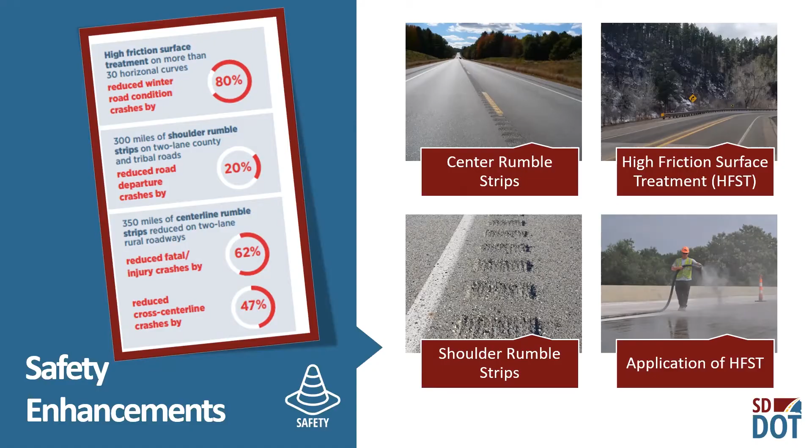So as you look at reliable transportation systems, we're focusing on new innovations. In the upper left-hand corner is a diverging diamond interchange. For those who've been in Sioux Falls, the 41st Street interchange, you know it's pretty tough to take a left coming off the ramp. Things really get buggered up. By looking at a different interchange configuration, we can help move traffic more efficiently and more reliably for folks traveling every day, and it's also a safer situation.

If you don't have the 511 app, I highly suggest you get it. Again, transportation systems being reliable. Hopefully you're using this app when traveling in winter or during summer construction season to see what's coming up, where construction is planned, and how you can plan your trip accordingly. In the winter, obviously, that's where we see our most hits. People are interested in road conditions, and whether they'll be able to get to their destination. This has been a tremendous opportunity to share that information with travelers, and again, help make our roads safe and our transportation system reliable.

In the upper right-hand corner, everybody's seen them, those are our dynamic message boards. These flash messages, Think Thursday messages, you probably see them every Thursday. It might be a little goofy sometimes, but the intent is to catch your attention and also make you think about your driving behavior and share that with others. We also use it to inform folks of closures, crashes, things of that nature, real-time information right on site to help make that system reliable and safer.

In the lower left-hand corner is something we don't have a lot of in South Dakota: congestion. My interpretation of congestion is a lot different than folks who live in LA or Minneapolis, but still, congestion is congestion, and we get frustrated when we see it. So we're working with our partners with the city, whether it's at the 41st Street diverging diamond or LaCrosse Street interchange, trying to reduce congestion and get people where they need to be in a time that feels appropriate.

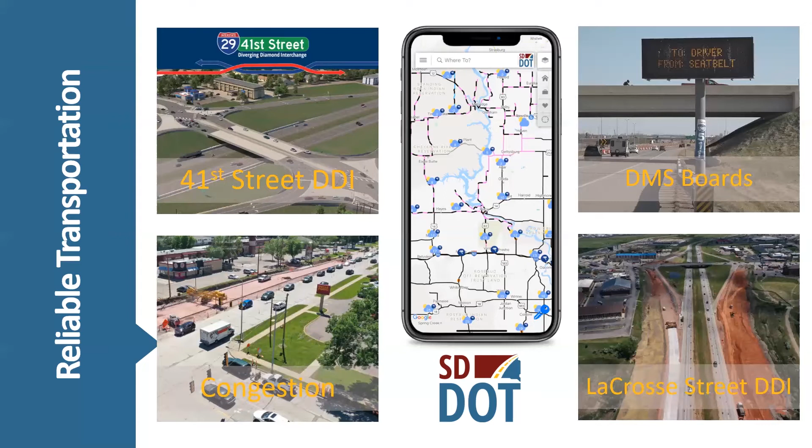So having a reliable system and a safe system is great, but we need physical assets. We need physical things out there in order to make that transportation system work. I really like this map.

It's just a picture of the bridges in South Dakota. Every single one of those blue dots is a bridge, and you can actually see the main river systems and tributaries that tie into them, whether it's the Jim River or the Big Sioux. The sheer number of structures we have in South Dakota is a little daunting for the number of people who actually reside here. We have over 5,700 publicly owned structures or bridges in South Dakota. That's a huge, huge investment.

We're working with our local government partners. As I mentioned earlier, we need an interconnected transportation system. It doesn't do us any good to grow grain in the back quarter if we can't get it to market. It doesn't do us any good to live in a house if we can't get to where we need to go. So working with our local government partners, whether through the Bridge Improvement Grant Program or a local federal aid bridge program, we're trying to improve structures across our state, not just on the state highway system, recognizing the interconnectedness of our transportation system.

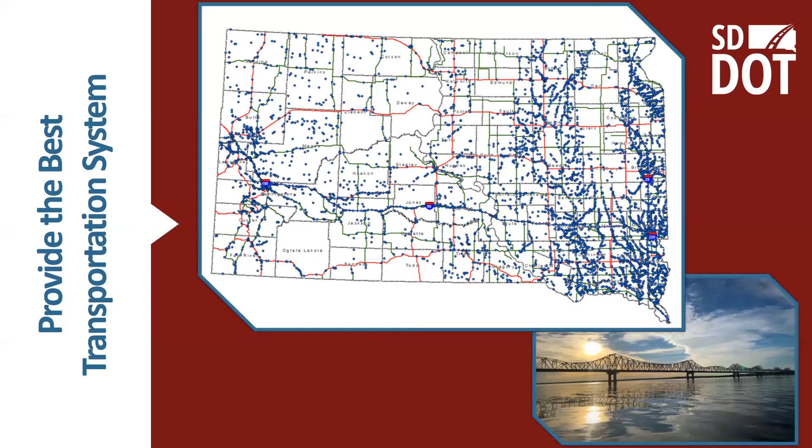As we look more at the state highways, we need to remember that, unfortunately, assets age. And when assets age, you'll have a good chance to see one when you step out the door tonight, with the replacement of the Lieutenant Commander John C. Waldron Bridge, the Pierre-Fort Pierre Bridge, as some of us call it. You can see on this graph the relatively large number of structures we have that are 45 to 70 years old.

This coincides very well with the build of the interstate system and the Federal Aid Highway Act. There was a lot of infrastructure built in that time frame. We've done a tremendous job as a department maintaining and really preserving those structures over time, with over 95% of our bridges in good to fair condition.

So we're in a good position now, but like every asset, whether it's a 1984 Chevy pickup that you got, at some point in time it's no longer feasible for us to maintain those. So we're working to flatten that curve and do those bridge replacements earlier, and also not run into that bigger problem 8, 10, 12, 15 years down the road.

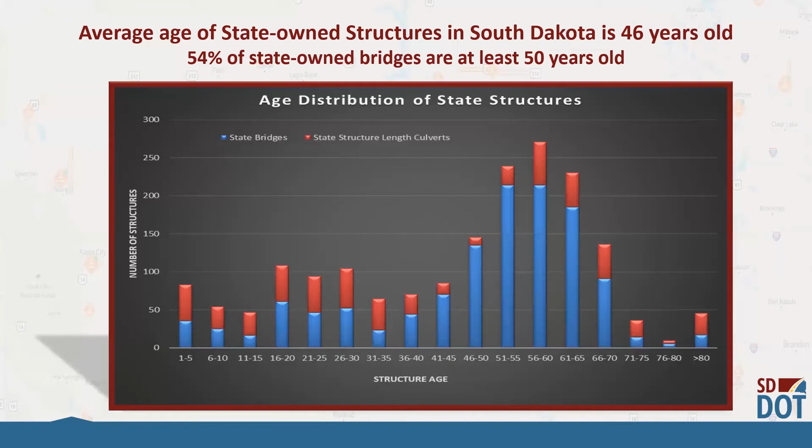We're also trying to focus on good long-term solutions with our bridges. The picture in the upper left-hand corner is what we call riprap, or rock. Everybody should be familiar with it, you see it around structures. But if we can improve the reliability during flood times, which we saw some of in 2019, especially along the I-90 corridor near Mitchell, if we can improve the reliability and plan for those higher events, it improves our resiliency as a state.

Now instead, we have an overtop on a roadway. Roadways are a lot easier to fix than a bridge.

The upper right-hand corner, that's one of our drones, or unmanned aerial systems, and we deploy them throughout our state. They're mainly used for our bridge inspection purposes. The drones have been very efficient and very effective for us to actually visually inspect our structures across the state — time savings, better quality. Deploying technology like this is allowing us to be more agile and deliver a better transportation system.

The lower right-hand corner, that's steel, but it's a different type of reinforcing steel. Historically, a long time ago, we used essentially black steel on our bridge decks. For all of us that live in South Dakota, the upper Midwest, we know we need to add a little chloride, a little bit of salt in the winter to get that ice off the road. Black steel and salt and water really don't mix, so we transitioned over time to epoxy — essentially a plastic coating over our rebar. We're still having issues, especially in our bridge decks where a lot of that salt and water penetrates down into the concrete. So what you see there is actually stainless steel.

We anticipate this is going to give us about a 20% life cycle reduction in the overall cost of that bridge. And it's not just about the cost — it's the fact that we're not going to have to be out there nearly as often doing the rehabilitation. Yes, it's got a higher upfront cost, but in the same sense it's got a better long-term investment. So as we're looking at a bridge to last us 75 to 100 years, we're trying to focus on those opportunities to really preserve the integrity of that structure over time.

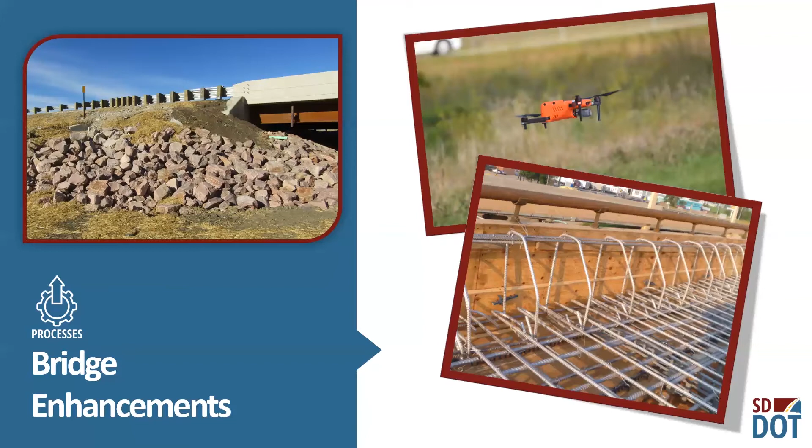Our target level is to have about 80% of our pavements at any given year in a good to excellent condition. You can see where our trend line has been and where we anticipate that trend line to be into the future — we're maintaining our pavements in a very good condition. Our intention to maintain that 80% level is focused on the highest return of investment. It's important for us to know that some roads just need to be replaced, just like some bridges, so we're always going to have some of those pavements in poor condition.

But if we can do improvements — not so costly — early on before that pavement gets to be in poor condition, we save time, we save effort, and we save a lot of money when it comes down to it. And it's not just using our pavement management system and our really neat spider van, if you ever want to take a look at it, but it's also looking at other innovations for how we can build those roads better for the future.

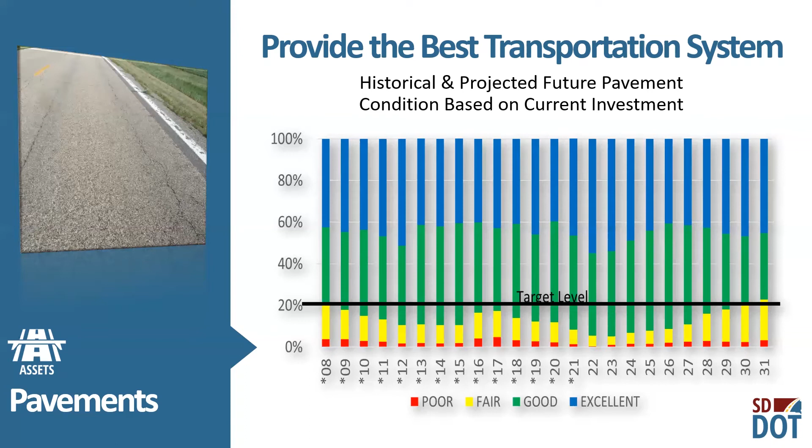I know I went through a lot of information there about our transportation system. I know you can tell that I'm excited about it and that I love it, but we all have that passion within the department, and it's something that we share, and it's a good thing. So I hope you're proud that the people that are helping to make your roads good are passionate about it.

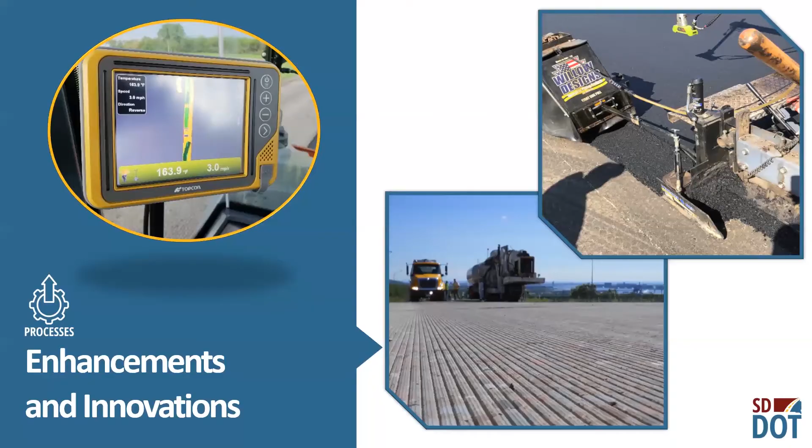I'm going to turn it over to Jason. He's going to talk a little bit about projects within the region, and then I'll come back up to get to the most important part, hearing from you tonight and what your thoughts about the transportation system could be. So Jason.

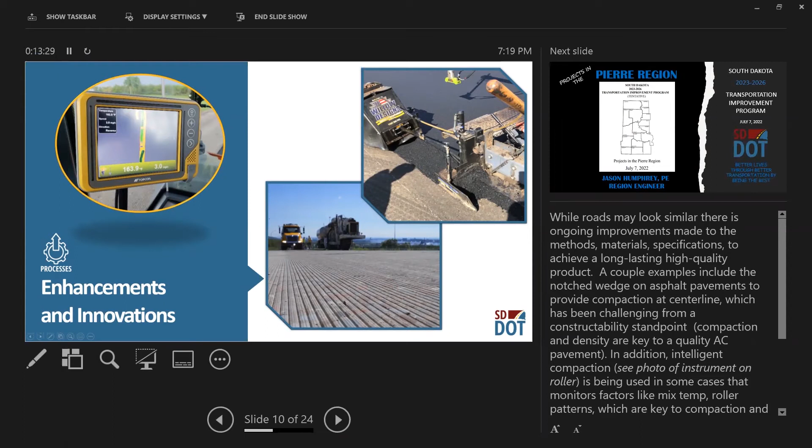Thanks, Mike. So again, my name is Jason Humphrey. I'm the Pierre Region Engineer. Pierre Region, just a little bit of demographics. Pierre Region consists of the 17 counties in the central third portion of the state, the counties identified here on your screen.

Going to go through the projects, a high level overview of the projects that we have coming up in the Pierre region over the course of the next 4 years.

Before I do that, I want to once again introduce the area engineers that are here tonight, and one of them is not here tonight. In the northern part of the region, John Vilbrandt is our Mobridge area engineer. He'll be able to answer any questions basically from Highway 212 north, central part of the state.

Dean Bandwilly is our Pierre area engineer, so between Highway 212 and Interstate 90, that's kind of his general boundaries of his area. He's ill tonight, so he's not able to join us, but if you have any questions about projects in that part of the state, I'll be happy to answer those for you.

And then in the southern portion of the state, from I-90 south, Doug Sherman is our Winner area engineer, and he'll be happy to answer any questions that you might have from down in that part of the country.

So over the course of the next 4 years, just in the Pierre region alone, we're going to have approximately $430 million worth of improvements to our infrastructure. That's a big number. I mean, that's larger than we've ever had for this portion of the state.

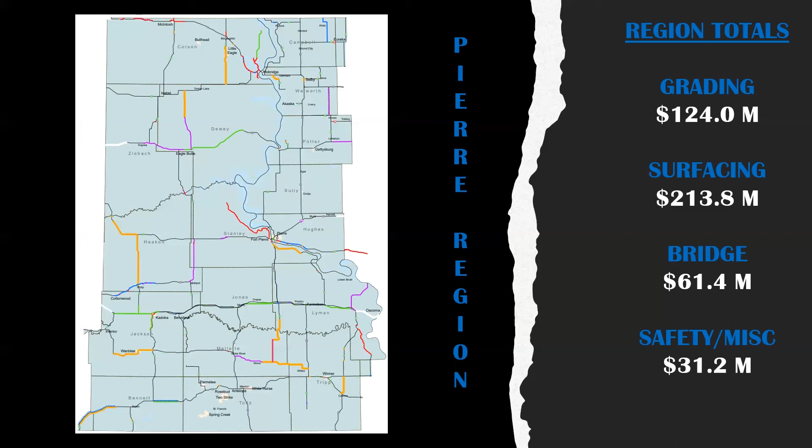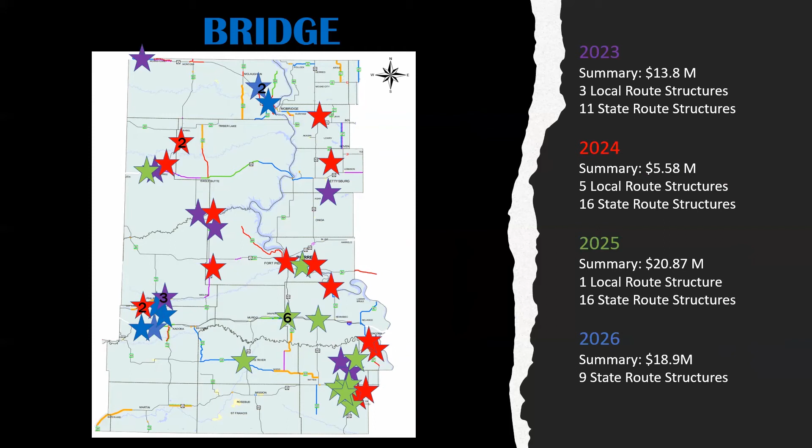Moving now into the surfacing and resurfacing projects, as well as our grading projects. In 2023, we have 21 resurfacing projects. All of the projects that we have identified in the Pierre region are going to be asphalt resurfacing projects that I'm going to focus on here, so I won't say it's an asphalt resurfacing project because they're pretty much all going to be asphalt. But we have 21 projects totaling about 148 miles and approximately $75 million worth of work coming up in fiscal year 23.

And if you look at your STIP list, you can follow along and get a little bit more information about each one of these particular projects. The numbers I'll be highlighting are on the left-hand side of the page, and you can follow along and identify which projects I'm looking at.

Project 12 is an asphalt resurfacing project going north and west from Eagle Butte. Project number 28 is a resurfacing project between White River and Wood. And then project number 37 is an asphalt surfacing project that's going to surface the newly constructed Highway 47 going north of Hoven.

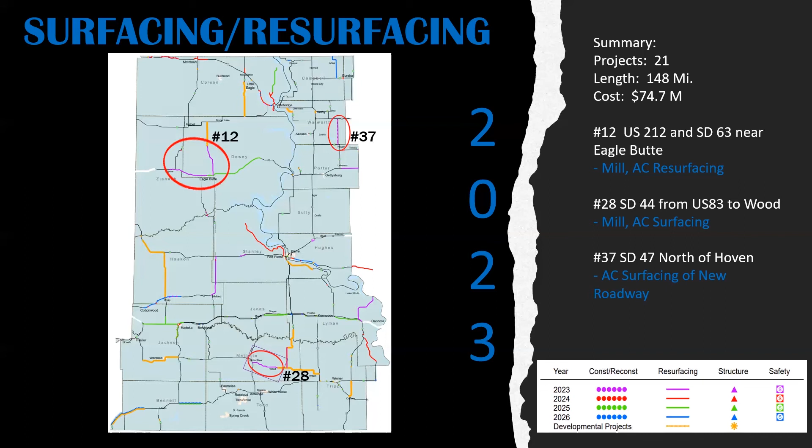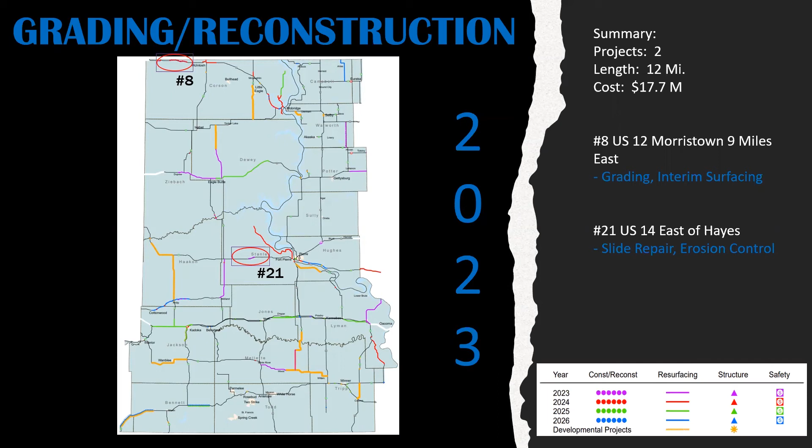Moving into grading and reconstruction projects, in 2023 we have two projects totaling about $17 million. The first is Highway 12 up by Morristown, a 9-mile project. The second is a smaller erosion control and slide repair type project near Hayes, west of Fort Pierre.

Moving on to 2024, we have 7 projects, about 110 miles worth of roadway, $56 million worth of work. Significant projects include project number 77, an asphalt surfacing project on 3 separate roadways, Highway 1806, Highway 12, and Highway 63, just west of Mobridge.

In addition, project number 95 is a resurfacing project extending from the city limits of Fort Pierre north on Highway 1806 to the end of Mission Ridge Road. That project will again just be an asphalt resurfacing project.

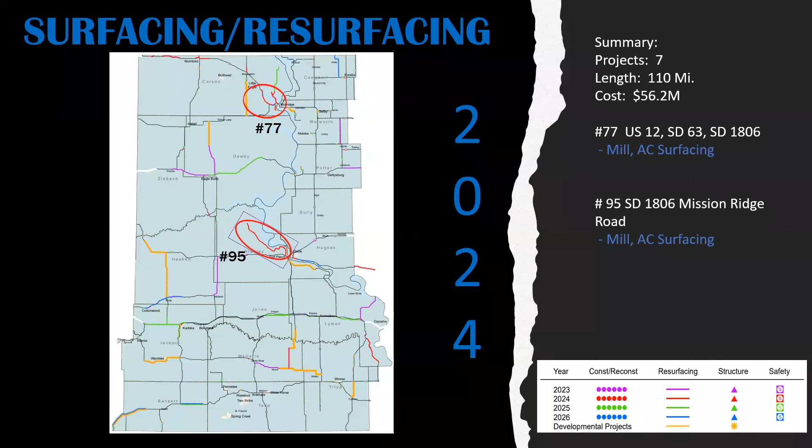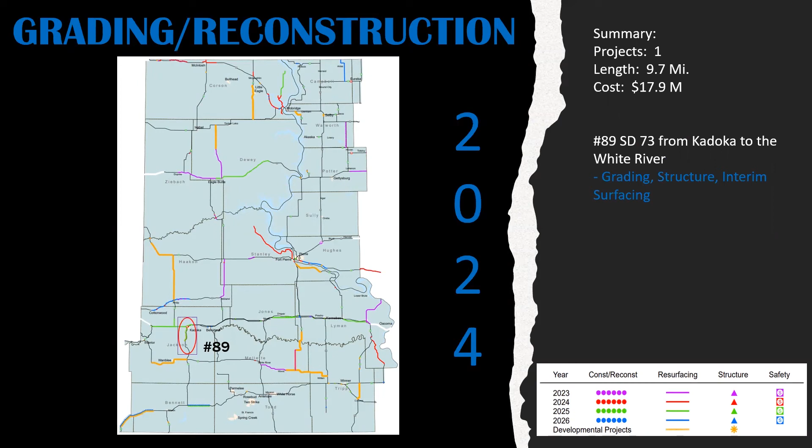2024 grading projects, we only have one project in this particular year, from Kadoka south to the White River. We'll be regrading that section - it's just under a 10-mile project - and the following year, in 25, we'll have the surfacing placed on that job, which leads me to the 2025 surfacing projects.

We have 5 total projects in 2025, $47 million worth of work being invested. In particular, project number 143 is an asphalt surfacing project going east from Eagle Butte. You'll notice there's a lot of work happening up in that part of the country, a lot of much needed work and repairs going on there.

In addition to that project, we have project 147, which is an asphalt surfacing project on both eastbound and westbound I-90, going from Cactus Flats to Kadoka.

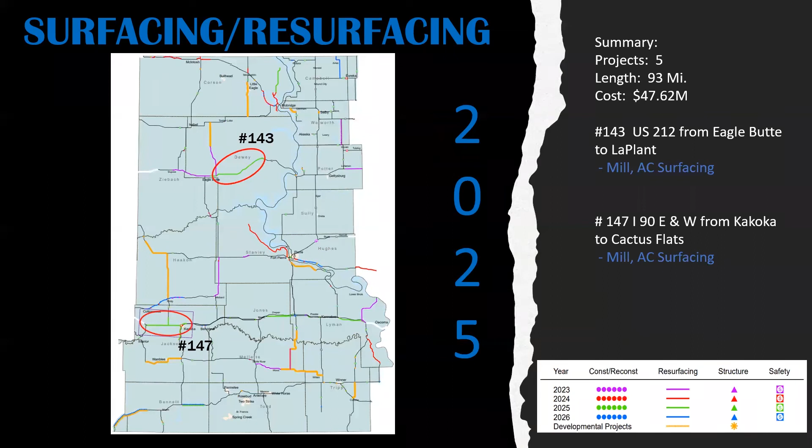Then in 2025, we have 2 grading projects. The first is project number 141, extending from the intersection of Highway 18 and 73 east about 11 miles - grading and interim surfacing on that.

And then project 145, which is a project a lot of folks right here in Pierre are very interested in, will be reconstructing Euclid Avenue from the 5-lane down here on Sioux Avenue, all the way to the northern limits of the city of Pierre.

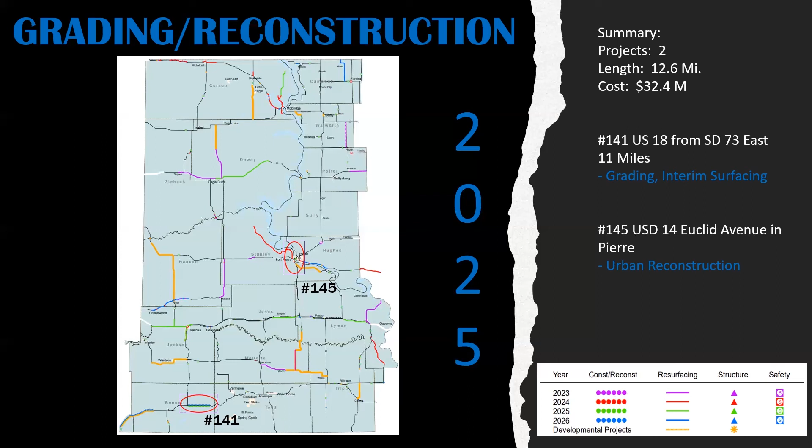2026 surfacing projects: we have 4 projects in the STIP at this time, 93 miles worth of pavement. 2 of the significant jobs - one is project number 205, a surfacing project from Cottonwood to Phillip. And project 206 on Highway 34 east of Pierre, basically from the Farm Island turnoff to the Fort George recreation area east of town.

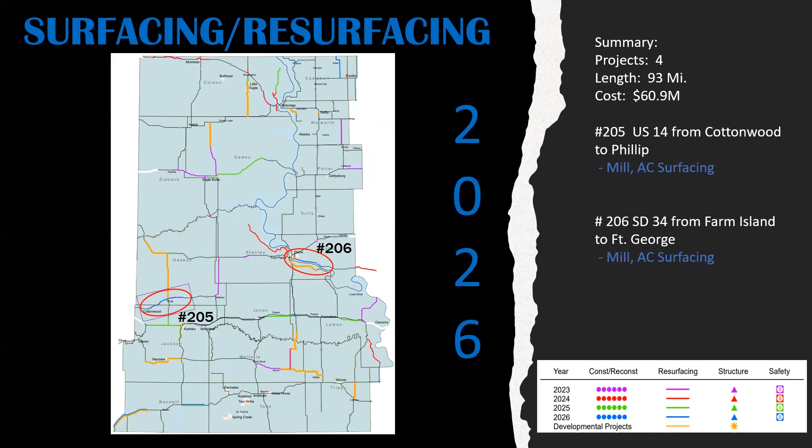And then last but not least, for our grading in 2026, we have 3 projects for 26 miles worth of grading. Project 198 is a grading project from basically Martin, west of Martin, extending to the west. And project number 202 is another grading job west of Mobridge in the area of the casino - we have a structure and grading, approach grading project right there.

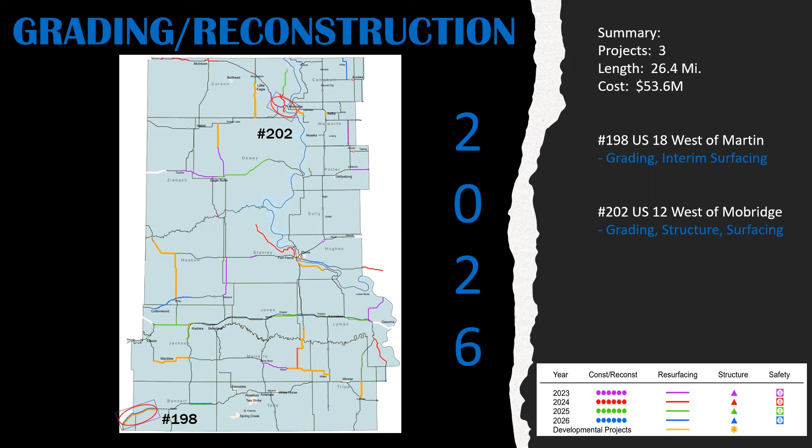So that was a lot of work going on in our grading and reconstruction arenas, but there's another area that Mike touched on which is important to the department as well, and that's our safety projects. In the 2023 to 2026 STIP, we have approximately $40 million worth of safety improvements that we're going to be working on. Types of projects Mike touched on include high friction surface treatments, asphalt chip seals, railroad crossing improvements, pedestrian walking and bike paths, pavement marking, and signing projects, both on the state system and on the county system.

So we have a lot of work going on just to make improvements for our travelers. 4 of the projects that we're pretty proud of and excited to get completed are the pedestrian walkway projects. In 2023 and 2024, we're going to be doing projects in La Plant, Wanblee, right here in Pierre, and in Wakpala. Those are very important projects to our pedestrian travelers, because not everybody drives a car. We have a lot of different modes of transportation, and we work to satisfy the needs of all of those travelers. Some of our locals are very much excited to get those done.

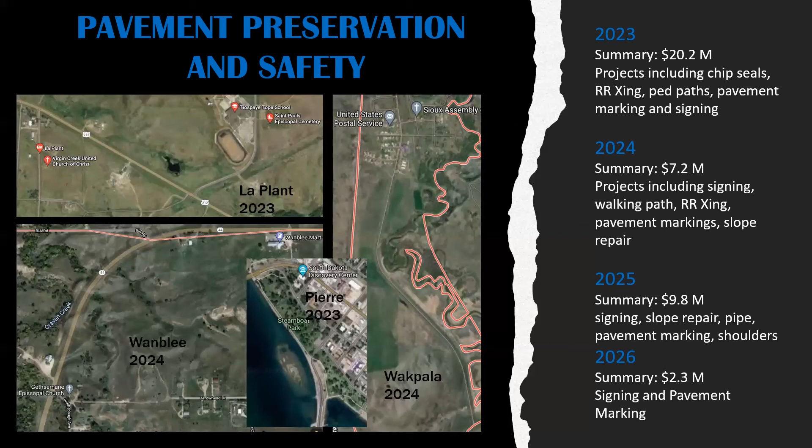So with that, that is a high level overview of all the projects we have coming up over the next 4 years, and we'll be around here for a while afterwards, and Mike will be addressing any questions that anybody might have. So Mike.

Thank you, Jason. We are to the most important part, which is getting input and testimony. So for those of you online, you can definitely type your questions in. We'll do our best to answer them. And also for those of you here, we do have a microphone. I would ask that you raise your hand, and then when Mark comes around the microphone, introduce yourself and who you represent. We want to do that for the record.

The intent tonight is, again, to get input, and we want to share that with our Transportation Commission. Our Transportation Commission is anticipating action to be taken on the overall program throughout the state at their August meeting. So your input obviously is very important, and we want to make sure we can capture that. So we're going to open things up here for public testimony. If anyone would be willing to ask a few questions or provide some input, just raise your hand and Mark will come right over. If we have any questions come up, just let me know.

First one to ask a question gets a highway map.